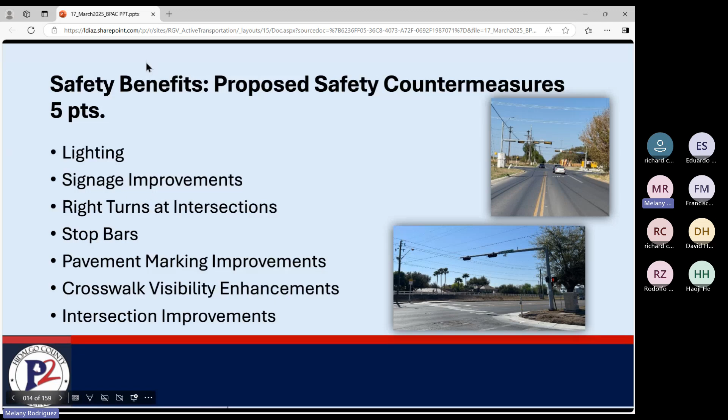Precinct 3, can you fast forward us, Melany, please, to item 4C, Los Ebanos Road. 4C is what we're going to be evaluating, so make sure you find the right scoring form on the very top of your paper. So Los Ebanos Road, 4C.

All right, thank you. That's the pointer and the clicker, okay? This one is to point if you need to point, and this one is to change slides, left and right. Oh, I control that, huh? Yeah, if you want it for your flow. We can move stuff. Does that help? Sorry, folks, not really. Trying to go to your slide. We're gonna stick to that first slide anyway. Maybe you can help. Sure, okay.

There you are. Jorge Arcata, Chief of Staff for Precinct 3, representing this Los Ebanos Road project. We're in partnership with the City of Mission on this road project. Wanted to focus, let's get to that first slide, to give you a little idea of why this project is so important to the City of Mission.

The funding we seek today will augment this project, which I think moves past desirable to the category of vital. And I'll tell you why. You can see this alignment of Los Ebanos Road, paralleled by Conway on the east and Inspiration on the west. Both of these major thoroughfares for the City of Mission, especially Conway, their main street, have very busy intersections at the expressway. Los Ebanos represents the one good opportunity for all of west Mission to create a very friendly pedestrian bicycle thoroughfare that crosses the expressway. That's the whole thrust of the request this morning.

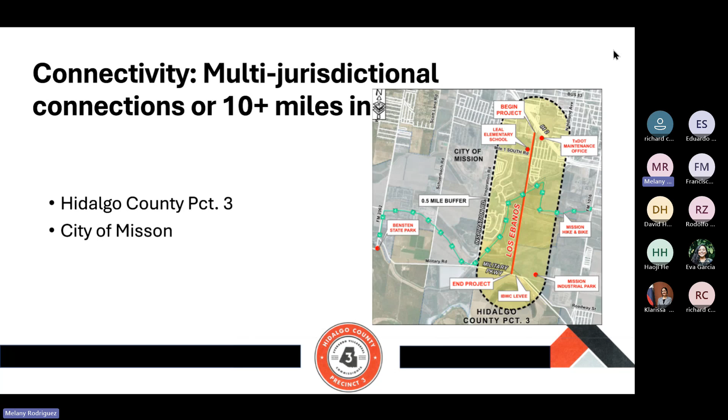Ready for any questions? Are there any questions? All right, we have one question.

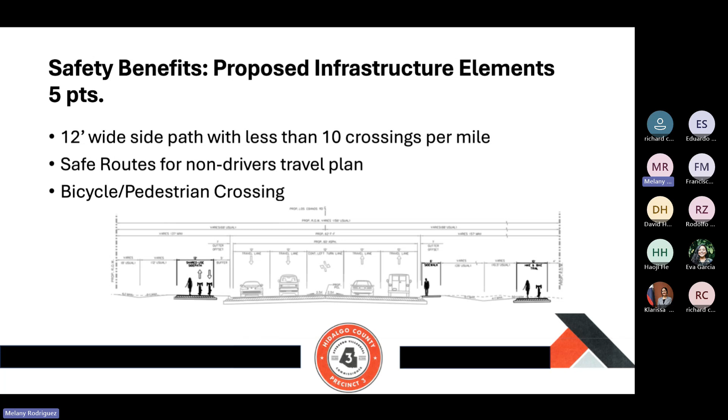Thank you. Thank you.

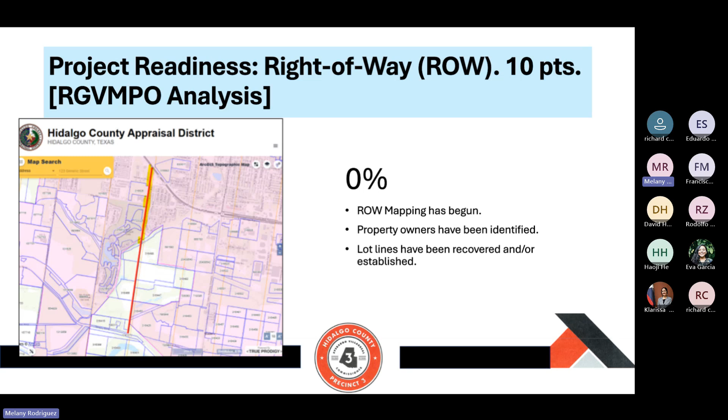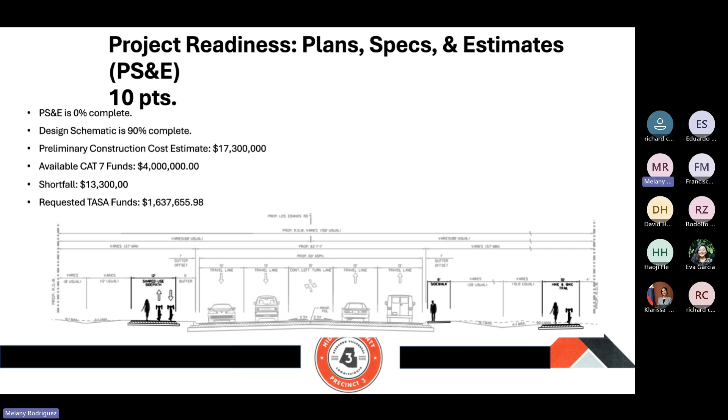Freezing too, I'm sorry, we're gonna try to go back to 4A. That was again 4C, presentation and evaluation regarding the Los Ebanos Road project proposal. For 4A, it's presentation and evaluation regarding the Cesar Chavez Road Section 1 project. Jump back. Should work as long as they don't switch this. Did you go to section 1 now? First back, first back. Yeah, as soon as they're done, you let us know and you pick them up. You can go ahead and get started.

Okay, if it's all right with everyone, I'll go ahead and get started. First of all, good morning. My name is Armando Garza, and I'm here representing Hidalgo County Precinct 2. I am the RPIC for all of the TxDOT projects in Precinct 2.

I'd like to get started with our first section, but I wanted to mention that we will have 2 sections of this project that will coincide with one of the largest local government road projects, which is the Cesar Chavez Road Project, which will begin on the south end at Ridge Road. Section 1 is from Ridge Road to Business 83, and Section 2 will be from Business 83 to Nolana. In total, the roadway project and this type of funding request will cover 3.5 miles, which is an extremely ambitious project, but we consider it to be a community altering project—not only the road project itself, but if we're able to make these walkable streets, we feel we will have a major impact, not only on the well-being of the community, but also helping it grow through economic development. And we'll also start relieving some of the traffic we always deal with on Expressway 83, giving an outlet north on Cesar Chavez.

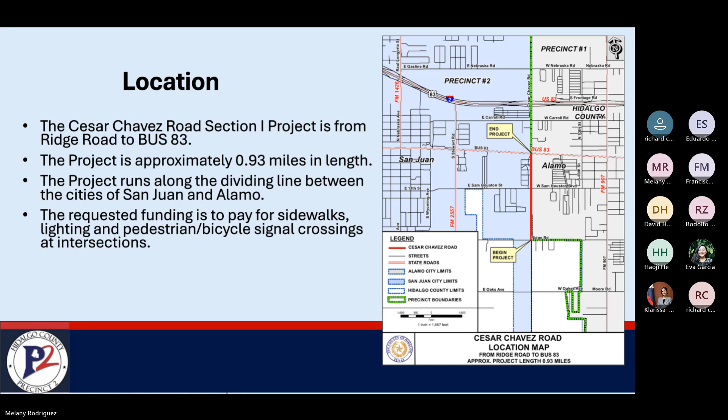This project is actually quite advanced. We have already submitted 90% PS&E to TxDOT; that was submitted on February 7th. The construction cost estimate currently is 8.671 million. We have 6.193 million in Category 7 funds. The shortfall of funds is about 2.47 million, but at this time we are only requesting $698,113.04. This project is currently scheduled for construction in fiscal year 2027, but we are very aggressive and are hoping we can accelerate that to late fiscal year 2026.

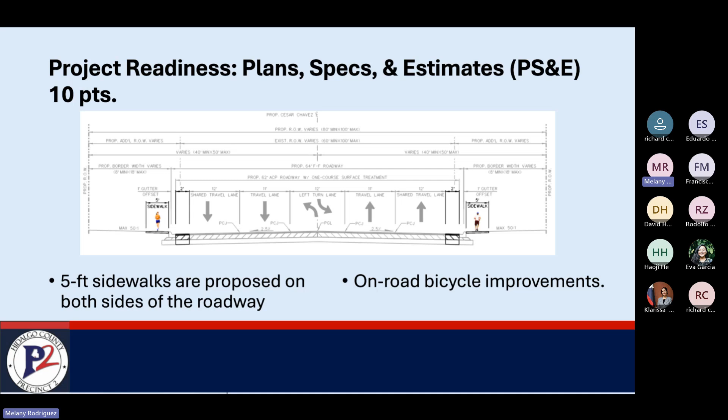This project is currently 100% environmentally cleared, and we received the categorical exclusion back in February of 2021.

Right of way is also currently very advanced. We have an executed right of way AFA, and the right of way map is 100% complete. The total number of parcels for this section is 16. We have 100% appraisal, 100% review of those appraisals, and 100% of the initial offers already complete. All final offers have been sent. We have 100% title commitments, and we currently have 9 parcels in possession and 7 under negotiation.

Utility coordination is 100% underway. I want to be clear about underway because we all know how difficult that can be. But all companies have been notified of the project, and all utility adjustments are on schedule to not conflict with the construction letting.

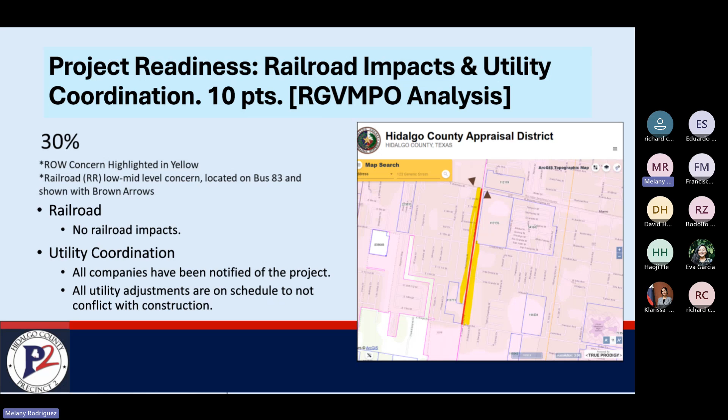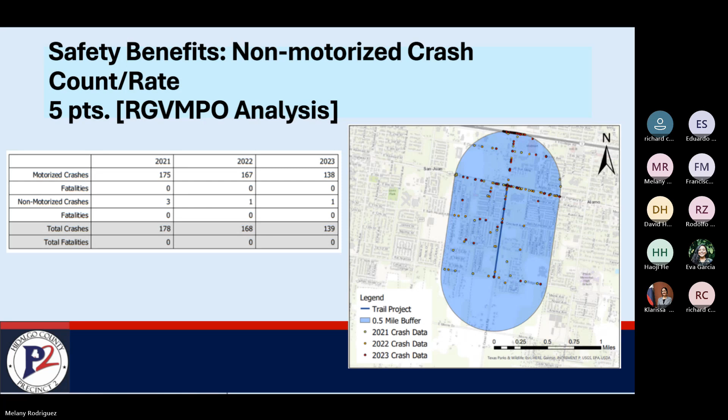Safety benefits. One of the biggest items impacting the 2 communities affected by not only the road but the sidewalks are the City of Alamo and the City of San Juan. Being some of the smaller, cash-strapped communities, they struggle to properly light these roads. We're hoping to address that issue with this project.

Also, some signage improvements to help people be better informed and safer. We're going to be adding right turns at intersections, stop bars, pavement marking, crosswalk visibility enhancements, and intersection improvements. These are all key for pedestrian safety, particularly since these communities are smaller, cash-strapped, and many times these are details we always have to seek additional funding for.

Proposed infrastructure elements, safe routes for non-drivers with a travel plan. We're going to be adding bicycle and pedestrian crossings, which are currently non-existent, and on-road bicycle facilities as well, much needed because although we do have public transportation in this area, it is limited. So a lot of people use these bicycle lanes and sidewalks, not only to get to and from work, but to get to and from schools, shopping, and commercial areas.

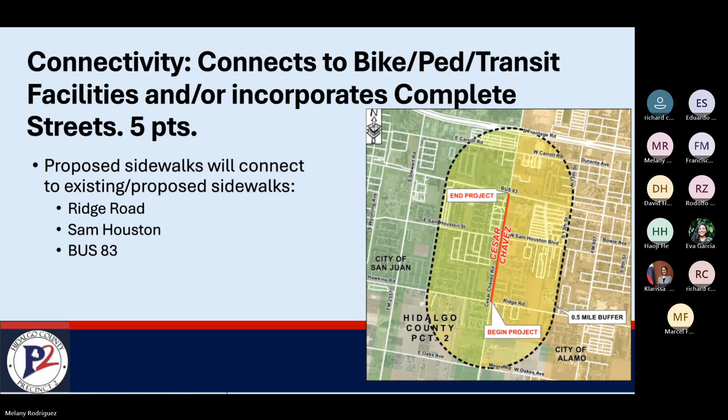As we mentioned, this area needs connectivity, particularly as it pertains to being able to go to social places like church, shopping. There's a Walmart, and something that's near and dear to our hearts, schools.

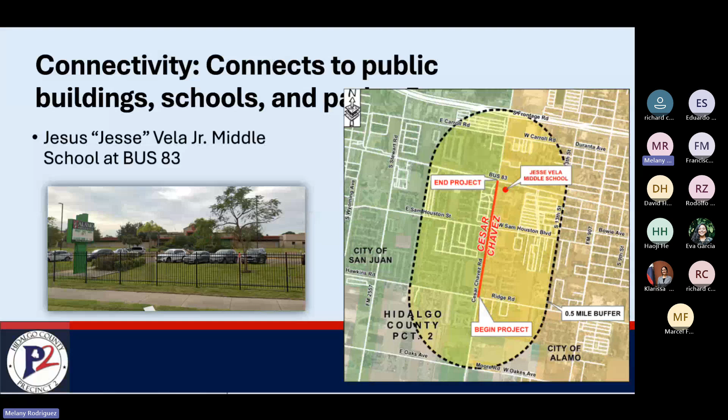There is a now called Jesse Vela Middle School right at the corner of Business 83 and Cesar Chavez. We have a lot of children walking in this area currently relegated to grassy spaces in the right of way. When it's raining or there's poor weather, that makes it increasingly difficult, and we're hoping to impact that with this sidewalk project.

We're very proud to say that we have reached out to many of the jurisdictions that will be impacted by this project, particularly Hidalgo County Precinct 2, the City of San Juan, the City of Alamo, PSJA ISD, and of course TxDOT by way of Business 83.

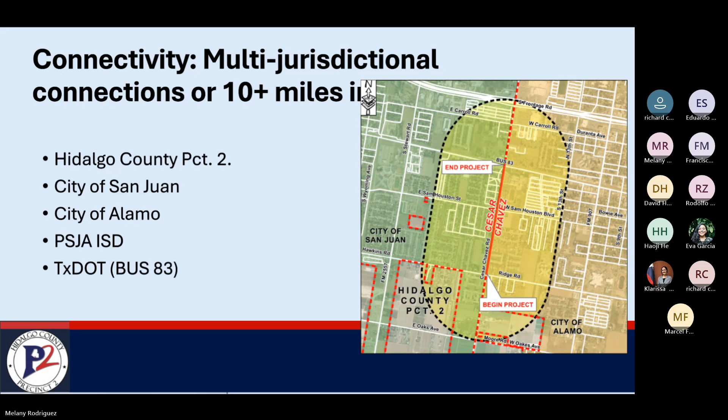I know I kind of sped through that a little bit, but I'm willing to answer any questions you may have. And if not, we have our team available as well that may be able to answer any technical questions that I cannot answer.

Thank you for the presentation. I have questions on the railroad, more from an ignorance perspective. This board's familiar with, the one time I think we had to send back money was because of a railroad issue, and I know that's why it was added. And I know this one is talking about the 30% railroad on Business 83. That was the utility coordination score the MPO analysis gave.

I don't want to say this, but you said that it's not going to give an issue with meeting the proposed timeline. I guess I'm trying to figure out, again not trying to get anybody, what are potential obstacles you see coming up?

Well, the one thing that I can tell you right now is that we've already had multiple coordination meetings with the railroad, and we're still trying to identify any potential conflicts, but at the current point we have not identified any obstacles with the railroad company. We've coordinated in the traditional ways by phone, email, but we've also done a site visit that was just completed earlier this month. In those coordination meetings and in the site visit, we feel very comfortable hearing from them that there will be no conflict at this time.

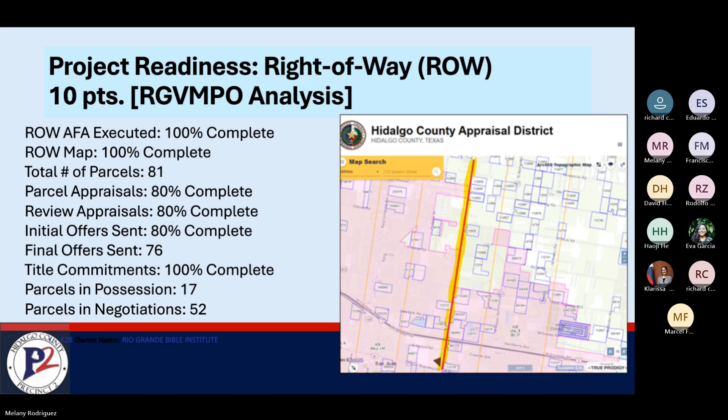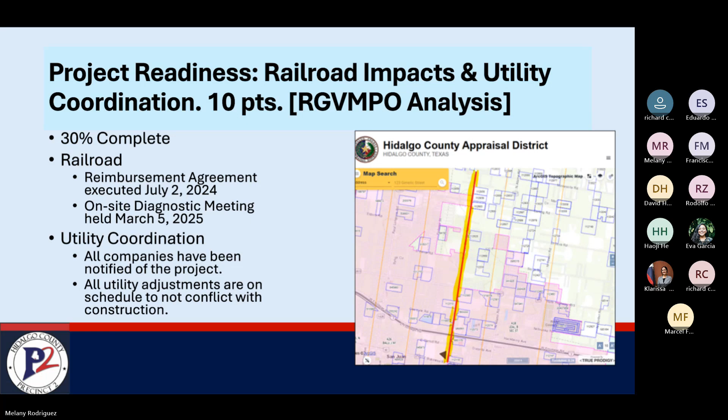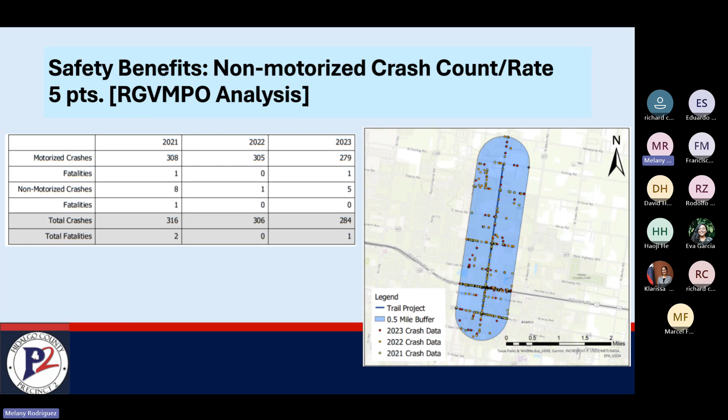Non-motorized crash count. This area had 8 non-motorized crashes in 2021, 1 in 2022, and 5 in 2023.

The proposed safety countermeasures we're proposing today are lighting, signage improvement, right turns at intersections, pavement markings, crosswalk visibility enhancement, intersection improvement, and stop bars.

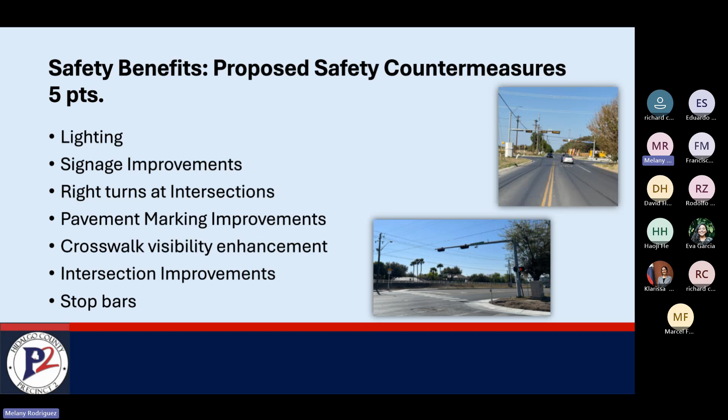Proposed infrastructure elements: we are proposing safe routes for non-drivers with a travel plan. We're going to add bicycle pedestrian crossings and on-road bicycle facilities.

This project currently does not promote and/or enhance resilience and sustainability elements. But as I mentioned in my discussion of section 1, we feel that once the project is fully implemented, we will begin to see some of these naturally and organically come up.

Again, this is a historically disadvantaged tract. Although there has been some economic development along portions of this area, those are very recent, and there are significant low-income families living here. We feel that projects like these can only serve to benefit not only the livelihood, but also the well-being of the community that has been disadvantaged for way too long.

Again, this project is within the MPO transportation plan as well as the TIP, and is currently funded under category 7.

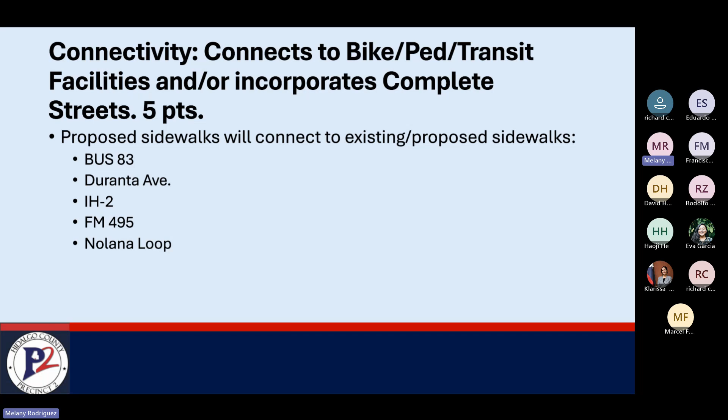There are several churches within the project limits: Iglesia Bautista Sendero, Iglesia Adventista del Séptimo Día, the Rio Grande Valley Apostolic Church, and the Bibleville Conference Grounds. We think it's extremely important to give safe bicycle and pedestrian access to individuals in this area for worship and other necessities like school and shopping.

Connectivity to a multi-jurisdictional connection, much like the previous segment. Precinct 2 has coordinated with the City of San Juan, the City of Alamo, PSJA ISD, and TxDOT.

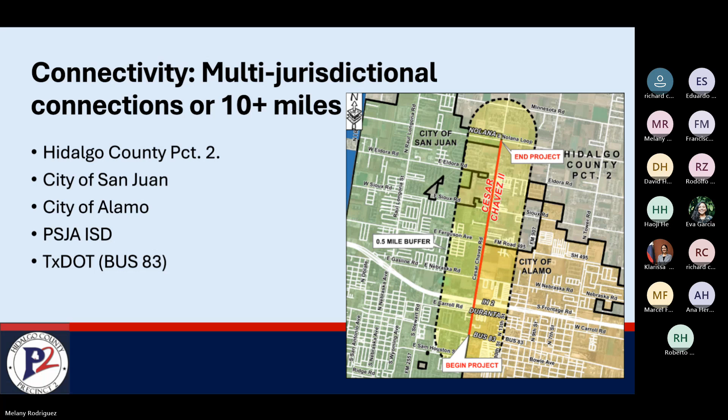As I mentioned in the beginning, this is a very ambitious project that has been in the works and being planned for almost 10 years now. I think we've advanced this project a lot. We've accomplished many things that at first did not seem possible for local government to do. But we're proud to say that we've been able to do that with the leadership of Commissioner Cantu, our engineers, and partners at L&G Engineering, and the cities of San Juan, Alamo, and the school district of PSJA ISD.

Being from the city of San Juan and being an alumnus of PSJA ISD, I can tell you this project brings me personal pride. Commissioner Cantu, also being an alumnus of PSJA ISD, takes these projects very, very seriously. We grew up in this community, and we feel it's not only our responsibility to provide for this historically disadvantaged area, but it is our privilege to serve our community and bring these amazing new projects that are going to be very transformative for this entire area. If you have any questions on segment 2 or segment 1, I'll be happy to answer.

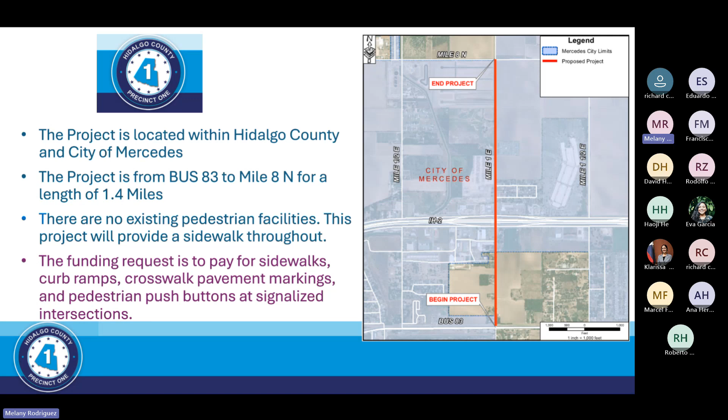Project readiness: the PS&E's are 60% complete. Construction cost is estimated at $9.5 million. Available funds are $6 million. Our shortfall is $3.5 million. We are requesting $772,000. This is scheduled for construction fiscal year 2027.

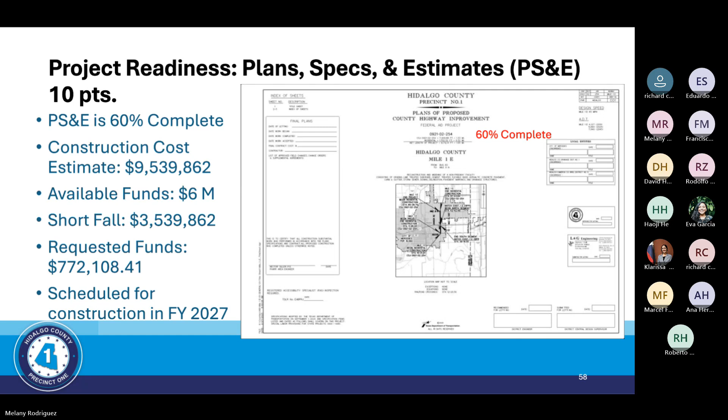This is project readiness. Mile 1 East is environmentally cleared. Categorical exclusion received September 2015. Reevaluation approved August 2022.

Project readiness: the right-of-way AFA has been executed, the right-of-way map is complete. Total parcels is 30 fee simple, 16 easements. Parcel appraisals are 50% complete, review appraisals are at 50% as well. Initial offers have been sent out and it's at 50% complete. Title commitments 28, and parcels in negotiation 20.

Railroad: preliminary engineering agreement with Union Pacific has been executed, coordination is at 60% completion. Utility coordination: the coordination was compensable and permitted utilities are at 60% as well.

Safety benefits: the non-motorized crashes from 2021 through 2023 are 4. Proposed safety countermeasures will have signage improvements, pavement marking improvements, crosswalk visibility enhancements, and pedestrian push buttons, separating pedestrians from motorized traffic, safe routes for non-drivers travel plan, pedestrian crossing, and traffic calming.

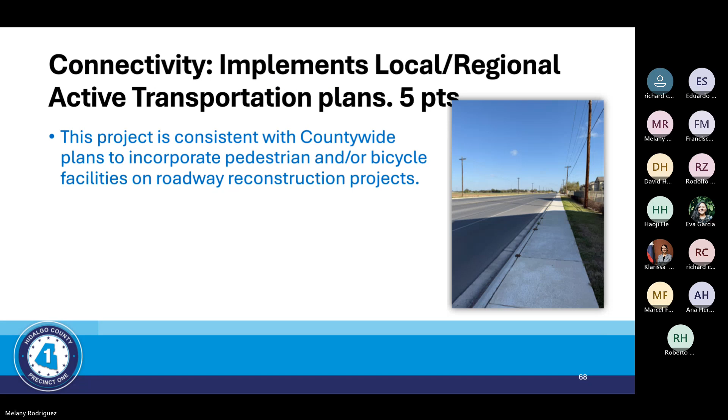Connectivity, this project is consistent with countywide plans to incorporate pedestrian and/or bicycle facilities on roadway reconstruction projects. Mile 1 East will be the first corridor in a developing area to include pedestrian facilities.

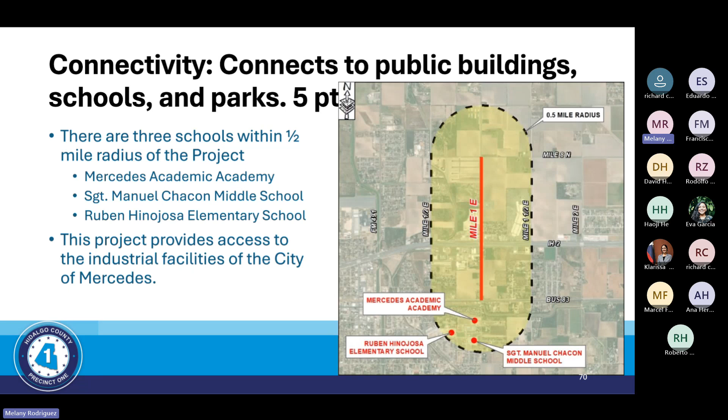Connectivity connects to public buildings, schools, and parks. There are 3 schools within a half-mile radius of the project: Mercedes Academic Academy, Sergeant Manuel Chacon Middle School, and Ruben Hinojosa Elementary School. This project also provides access to industrial facilities of the city of Mercedes.

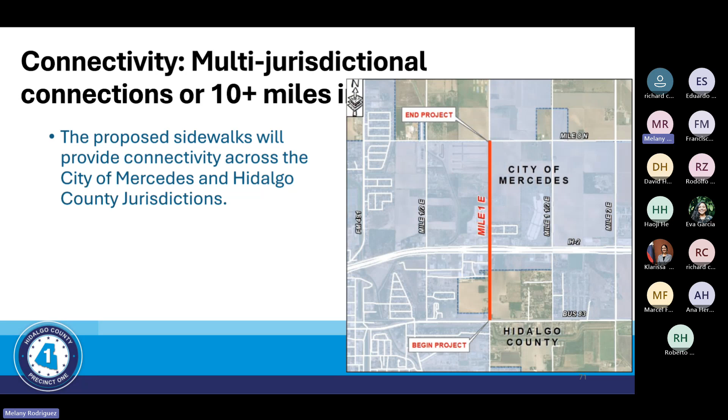The proposed sidewalks will provide connectivity across the city of Mercedes and Hidalgo County jurisdictions. And that's the end of that presentation. Any questions?

Morning. Morning. I just want to say one thing - I love the north and south routes. That's all, especially in August. Hopefully there are trees in some of those areas, so you get shade either in the morning or the evening, but I love the north and south. Thank you, that's my comment.

Can you elaborate a little more on the railroad, the partnership you guys have with them? We just had also a meeting, but I'm going to defer to our engineer consultant.

Hello, my name is Jacinto Garza with L&G Engineering. The railroad question you have on that - the reason we put 60% on that project is because there is no storm drain that's going to go underneath the railroad. The coordination is there to replank. There are 2 lanes right now; there will be 2 lanes with shoulders, and there will be mast arms. This is not a project where we are going in and having to tunnel under them, etc., as in other cases. That's why it's at that coordination level.

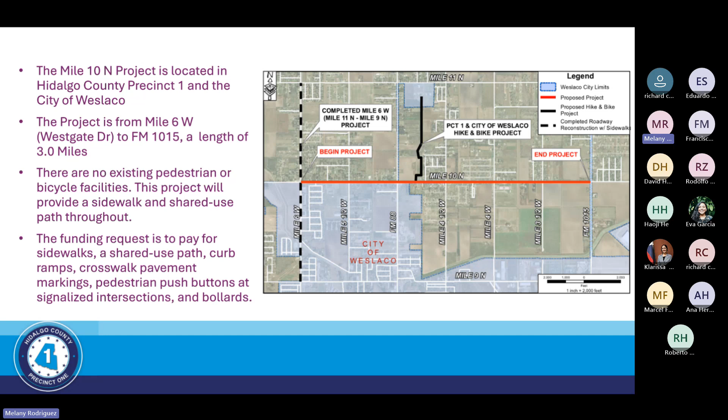There are no existing pedestrian or bicycle facilities. This project will provide a sidewalk and shared use path throughout. The funding request is to pay for the sidewalks, shared use path, curb ramps, crosswalk pavement markings, pedestrian push buttons at signalized intersections and bollards.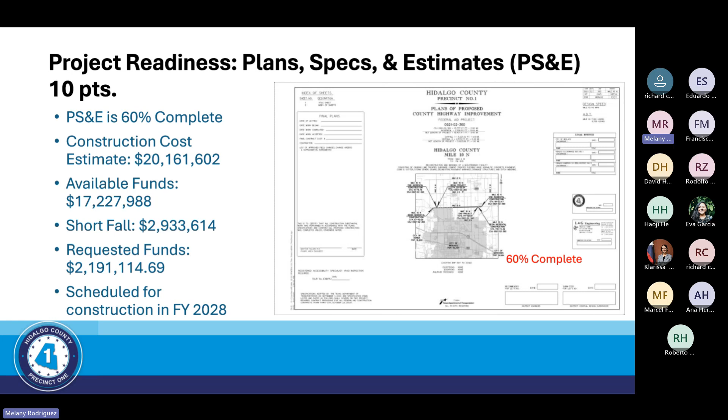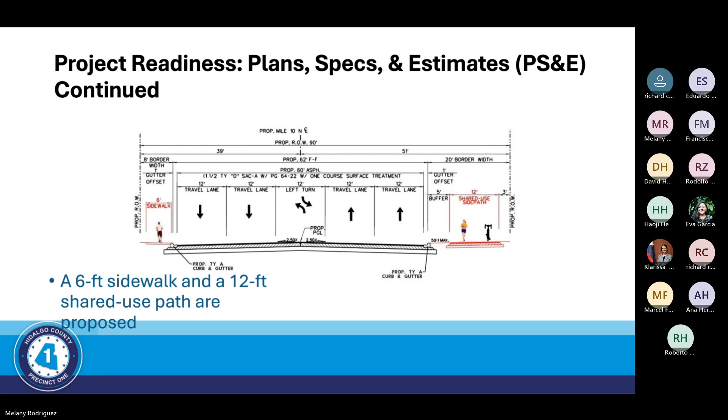Project readiness - as you see in the typical section, a 6-foot sidewalk and a 12-foot shared use path are proposed with a 5-foot buffer. Same thing, a sidewalk and a shared use path are proposed.

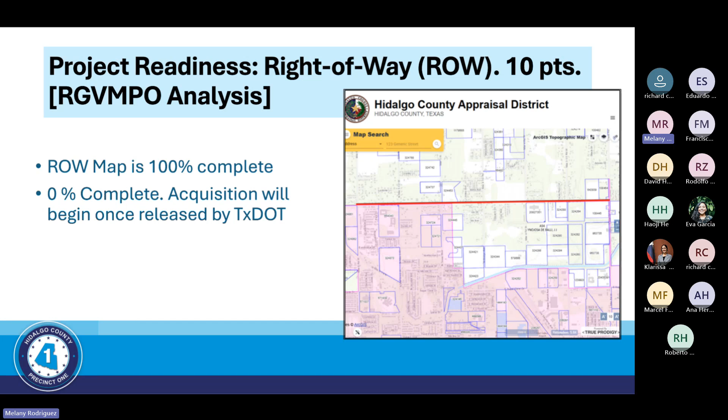Project readiness: Mile 10 is environmentally cleared - categorical exclusion was received April 2024. The right-of-way map is 100% completed. We have 0% acquisition; we'll begin once TxDOT releases us, and we're hoping and praying that in the next 90 days we'll get released to buy the right-of-way.

Railroad impacts - there will be no impact, there's no railroad crossing here. Utility coordination with compensable and permitted utilities is at 60% complete. Safety benefits - non-motorized crash data shows non-motorized crashes from 2021 through 2023 totaling 3.

Safety benefits include separating bicycles and pedestrians from motorized traffic, safe routes for non-drivers travel plan, bicycle pedestrian crossing, traffic calming, and a sidepath with less than 10 driveway crossings per mile.

The project does not promote any resiliency and sustainability elements.

Equity: yes, the project falls within a historical disadvantaged tract.

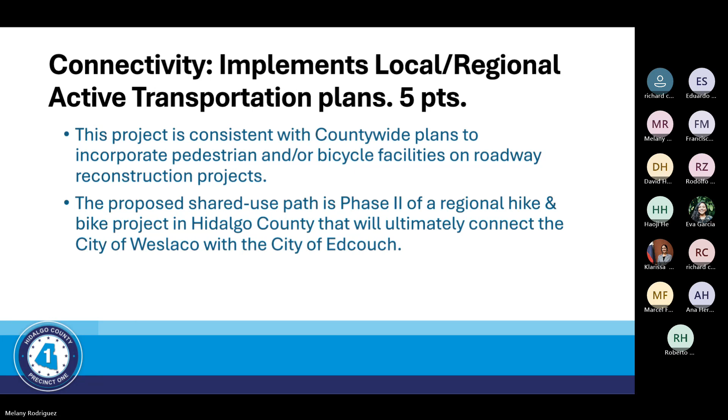The proposed bike pedestrian facility will connect to the recently completed Mile 6 West, which is Westgate, from Mile 9 North to Mile 11 North. We will connect to Mile 10, and connect to the proposed Weslaco hike and bike trail.

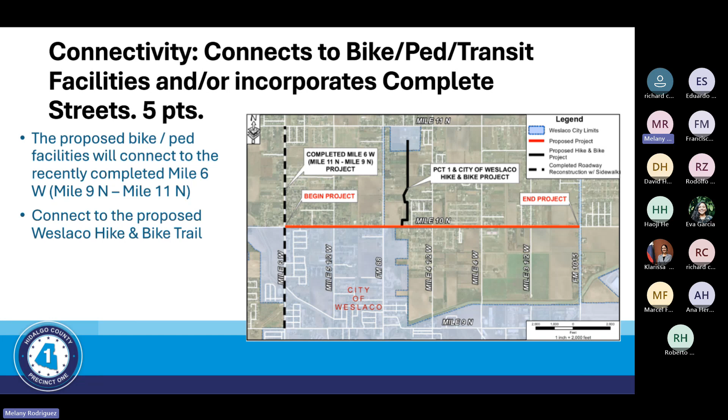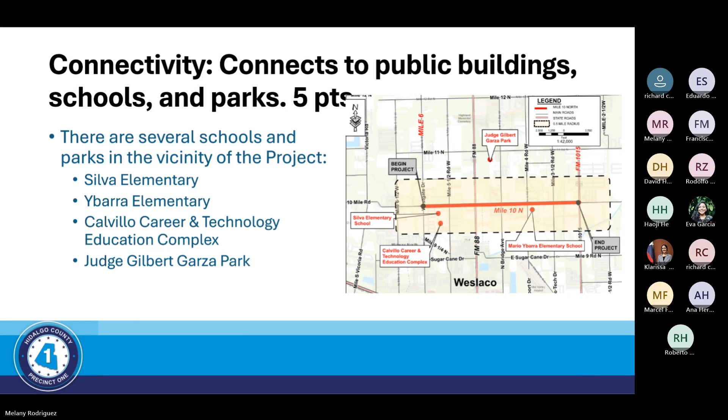There are several schools and parks in the vicinity of the project: Silva Elementary, Ybarra Elementary, Career and Technology Education Complex, and Judge Gilbert Garza Park. The proposed sidewalks will provide connectivity across city of Weslaco and Hidalgo County jurisdictions.

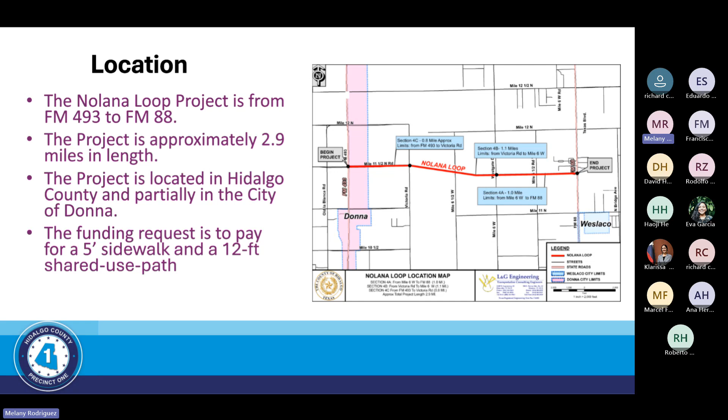Location: the Nolana Loop project is from FM 493 to FM 88, approximately 2.9 miles in length. It's located in Hidalgo County and partially in the city of Donna. The funding request is to pay for the 5-foot sidewalk and the 12-foot shared use path as previously mentioned.

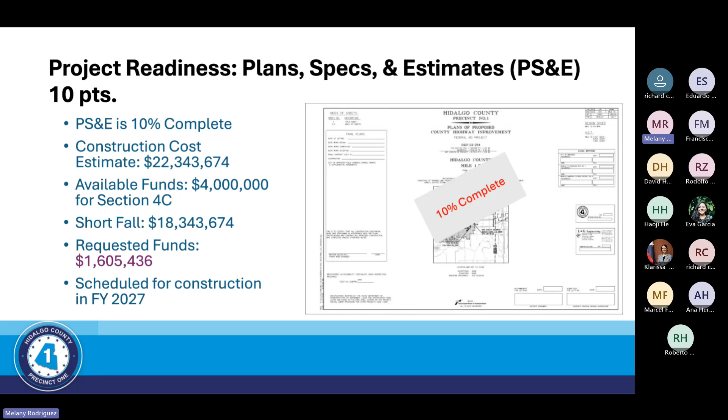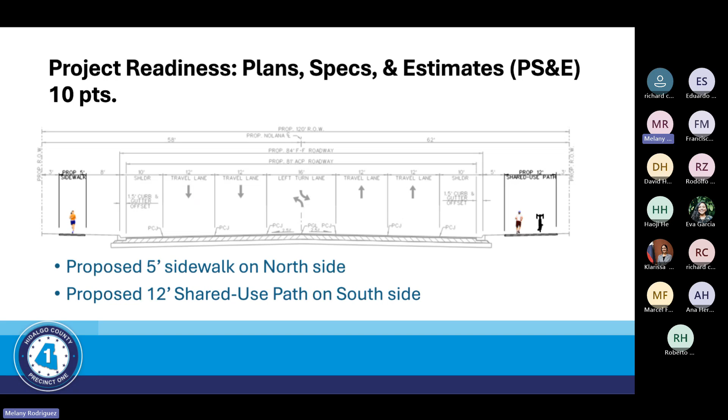Nolana Loop Segment 4 is environmentally cleared. It has a FONSI that was received in July of 2020. Reevaluation is currently underway.

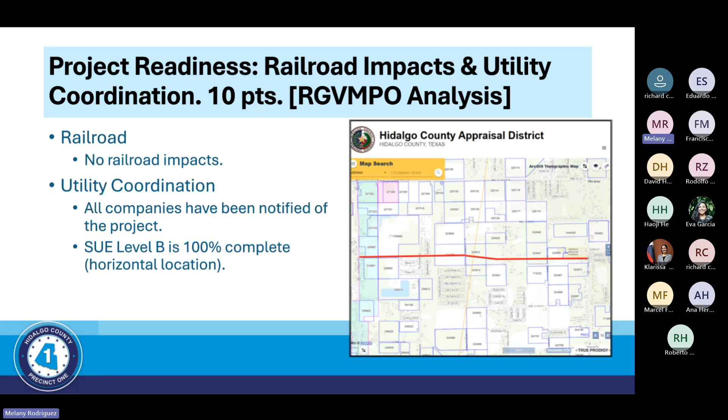Right-of-way acquisition is currently at 0%, but property owners have been identified. There are no railroad utility impacts, and all companies have been notified of the project. SUE level B is 100% complete with horizontal location.

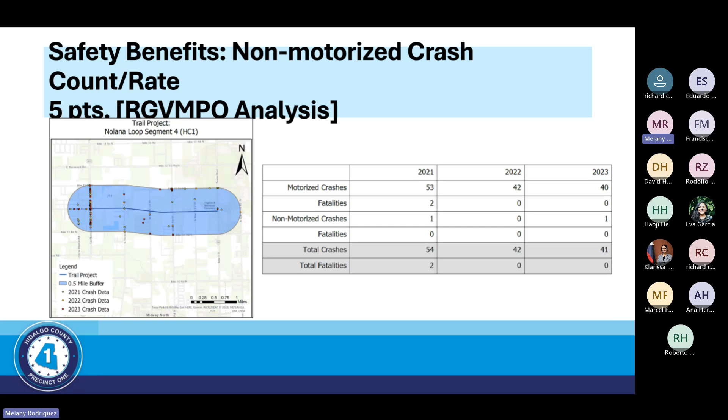The overall non-motorized crashes since 2021 to 2023 are a total of 2. The proposed safety countermeasures for this project include lighting, signage improvements, pavement marking improvements, crosswalk visibility enhancement, and pedestrian push button signals.

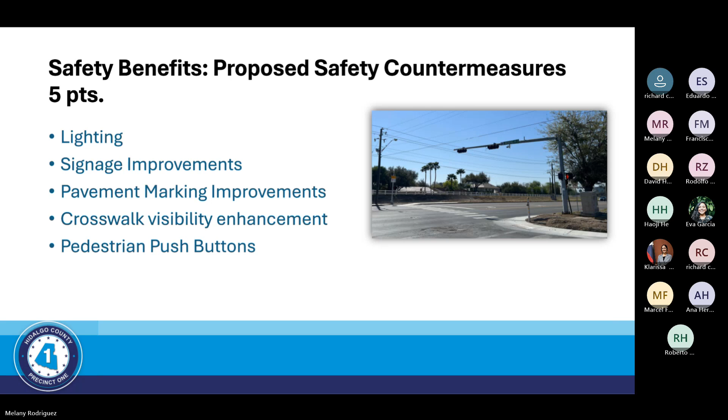The proposed infrastructure elements include separating bicycle and pedestrians from motorized traffic via the 12-foot shared use path with less than 10 crossings per mile, safe routes for non-drivers travel plan, bicycle pedestrian crossings, and traffic calming elements.

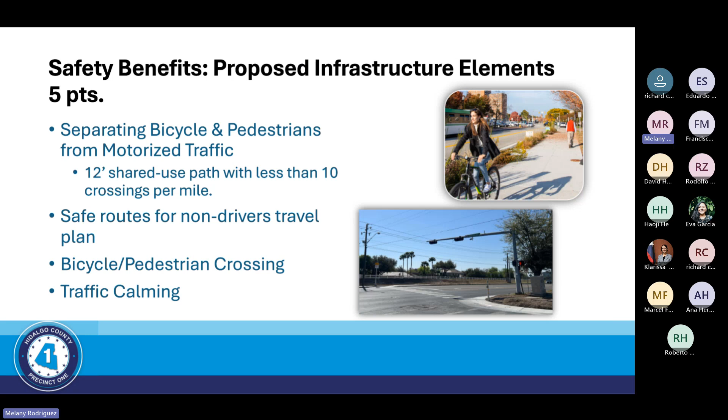The sustainability and resilience element to this project includes the proposal of powered solar lighting across the shared use path. This project does fall within a historically disadvantaged tract.

This roadway project is currently listed on the RGV MPO's Metropolitan Transportation Plan and the Transportation Improvement Program. The proposed sidewalks will connect to the existing proposed sidewalks on Mile 6 West and FM 88, and it connects to public buildings, schools, and parks via the Funeraria del Ángel Cemetery at Highland Park and Weslaco City Park on FM 88.

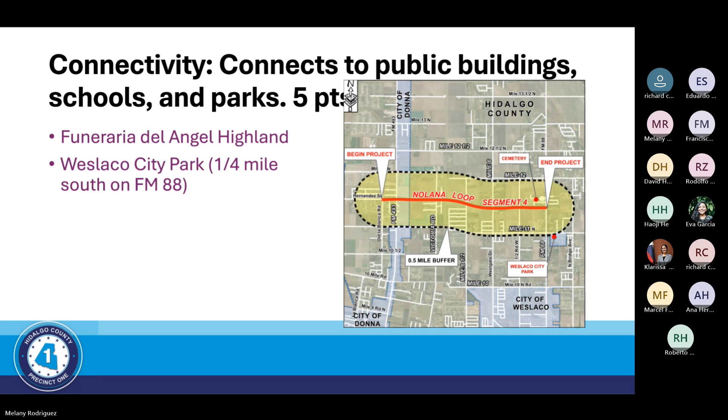The proposed sidewalks will provide connectivity across the city of Donna and Hidalgo County Precinct 1. The Weslaco City Park is also within a half-mile radius of the project.

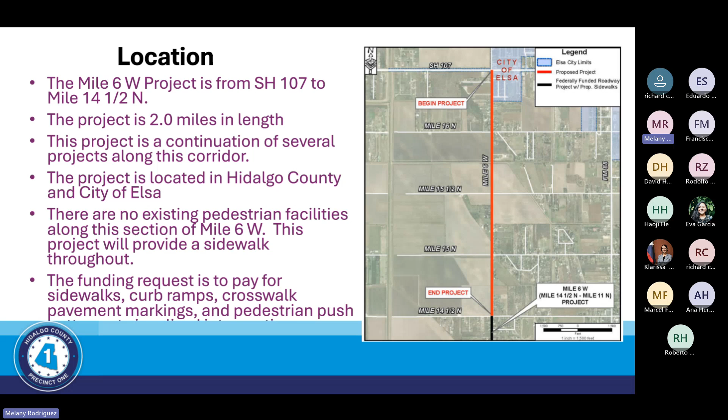PS&Es are currently at 95% completion. Our construction cost estimate is $12.1 million. We currently have $10.8 million available. Our shortfall is approximately $1.4 million. We are requesting $1 million. It's funded for construction in fiscal year 2028, but we are looking to accelerate to fiscal year 2026.

Mile 6 West is environmentally cleared. It received its FONSI in December 2015, and the reevaluation was approved in February of 2023.

There are no impacts to any railroad utilities, and there are also currently no compensable utilities. Coordination with the permitted utilities is at 90% completion.

From 2021 to 2023, there were no non-motorized crashes on this section. The proposed safety countermeasures include signage improvements, pavement marking improvements, crosswalk visibility enhancements, and pedestrian push button signals.

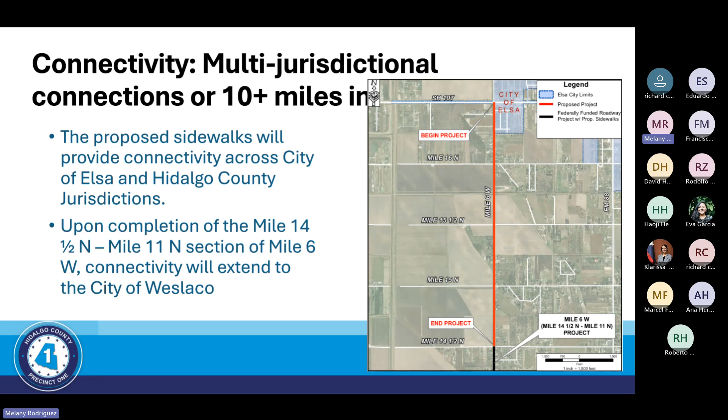For multi-jurisdictional connections, we have connectivity between the city of Elsa, Hidalgo County jurisdictions, and upon completion, the entire Mile 6 West improvement project will connect to the city of Weslaco. Any questions?

So if I understand correctly, mile 6 is Westgate, correct? Yes, and that's already gone through two phases of expansion and upgrades. So this would be connecting where it's currently, where the upgrades have stopped, all the way up to 107. Yes, because that's connecting to Elsa.

And then you did mention that some of those sidewalk and pedestrian traffic improvements will go south, because some of the steps you're proposing for this section don't exist in the southern portion, but you said you would like to upgrade the southern portion to include some of these upgrades as well. I think that was a bullet point. I just want to confirm I understood correctly. Let me verify.

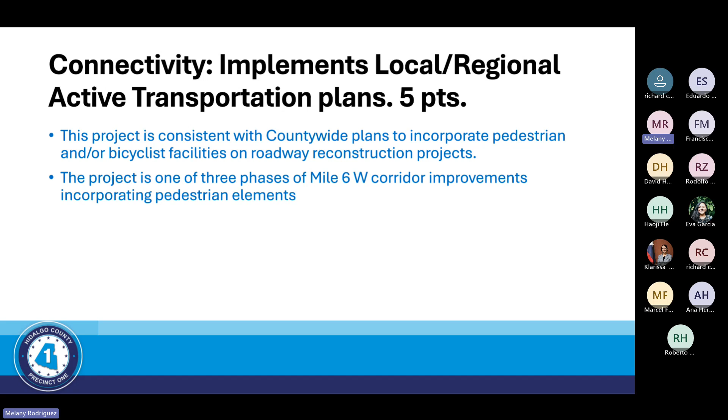I guess I want to understand what that means. So the existing section is mile 9 to 11 - those have sidewalks currently as part of their improvements. Mile 14.5 and 11 will include that as well, but because that project's not ready to let to completion, whereas this one on the north side is - there's already sidewalks from the expressway all the way to 11.

Yes, I've seen them there. The expressway all the way to 11. This will be a continuation going all the way to West.

Yeah, but from what I've seen when I drive there - I used to drive to Edinburg all the time and take mile 6 - there's sidewalks, but there's no push buttons or anything other than just sidewalks on those improvements. There's a really wide shoulder, which is great. But that's why I wanted to make sure I understood that bullet point. Hopefully that means it will connect from Business 83 to Elsa, which I think is a much needed project. So just wanted to make sure I understood.

We will have to look at the expressway, but on Mile 9, Westgate and Sugarcane, there is - push buttons? Yes, they are. And then Mile 10 all the way to Mile 11.

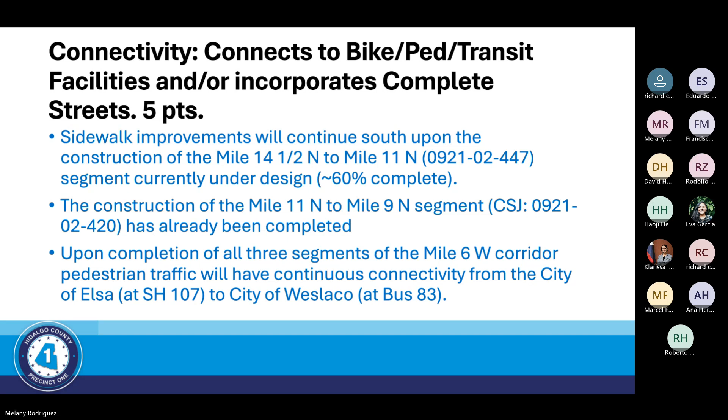Any other questions? Oh, it's green. Okay, thank you. Let's see, so I have a few questions just to sort of make sure I'm understanding this.

So there was still a difference between the requested funds - there was the shortfall, and then the requested funds that would address most of the shortfall. And then there was about 347,803.76 left after the requested amount. So I guess I want to know what's the plan for that. That's my first question.

We'll let our consultant answer that one. That requested funds of $1 million is just a typographic error. The requested funds is what's shown at the very beginning, which is 760,000. And I trust that will take care of the outstanding 34.7.

Yes. Okay, thank you. I would like to know more about the signals and push buttons. Do these include accessible pedestrian signage, things like audible signaling? And this was in the second project - both of these, or all these questions, are for the second project. Well, I do believe these are with ADA compliance in mind, so...

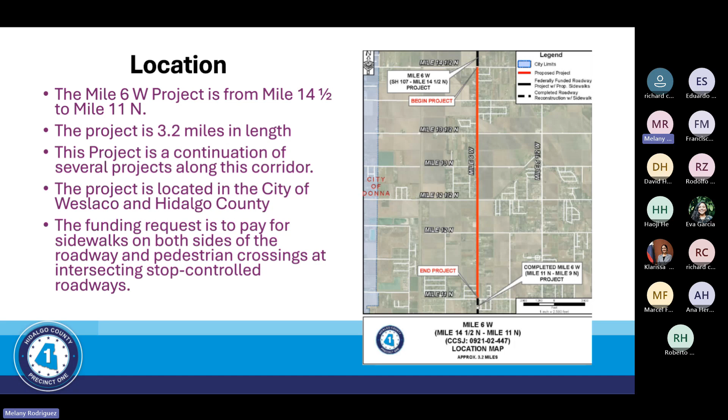Mile 6 west project is from mile 14 and a half to mile 11 north. It is 3.2 miles in length. It's a continuation of several projects along the corridor, and it is located within the city of Weslaco and Hidalgo County. Funding request is to pay for the sidewalks on both sides of the roadway and pedestrian crossings at intersections and at intersecting stop controlled roadways.

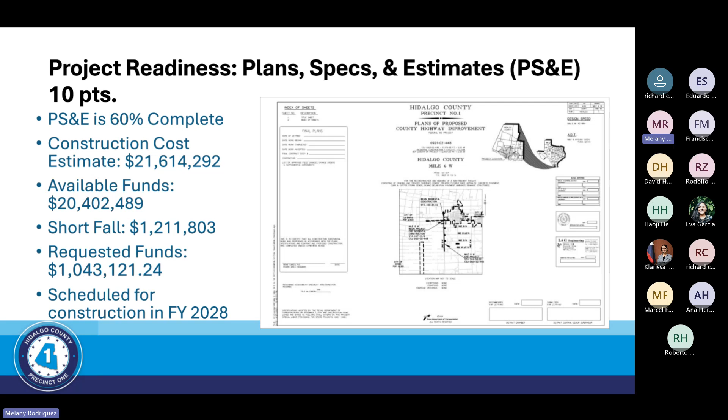PS&Es are currently at 60% completion. Our estimated construction cost is $21.6 million. We currently have $20.4 million available. Our shortfall is $1.2 million, and we are requesting $1,043,000. It's scheduled for construction in fiscal year 2028.

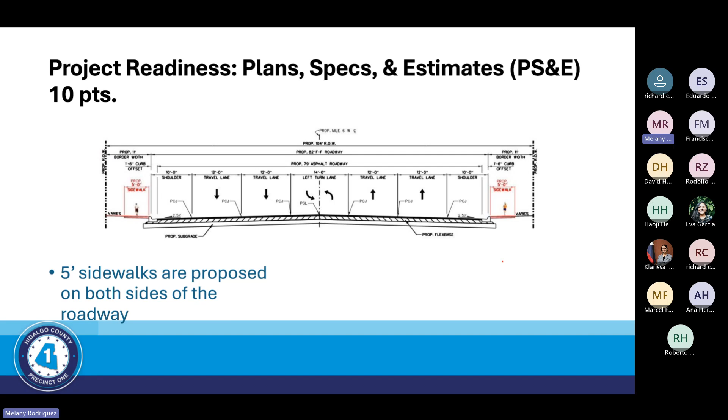For the typical section, 5-foot sidewalks are proposed on both sides of the roadway. It is environmentally cleared. The FONSI was received in December 2015, and it was reevaluated and approved in February of 2023.

Our right-of-way AFA is executed at 100% completion. Our right-of-way map is also 100% complete. There are a total of 87 parcels related to the project. 34% of them have been appraised. We've also completed 34% of the review appraisals.

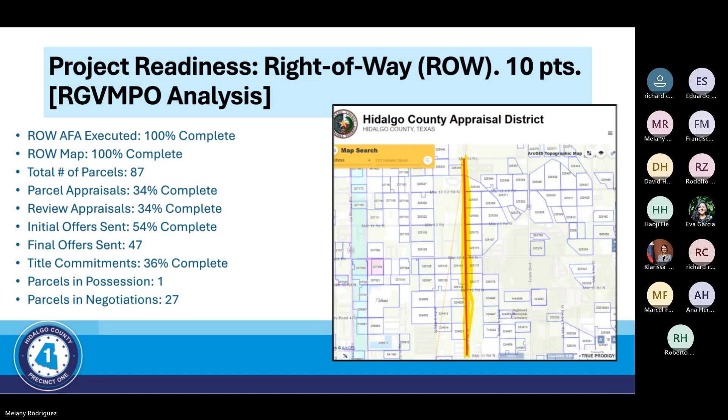We've sent 54% of our initial offers. 47 final offers have been sent. We have 36% completion on title commitments. 1 parcel is currently in possession and 27 are in negotiations. There are no railroad utility impacts, and our coordination with compensable and permitted utilities is 60% complete.

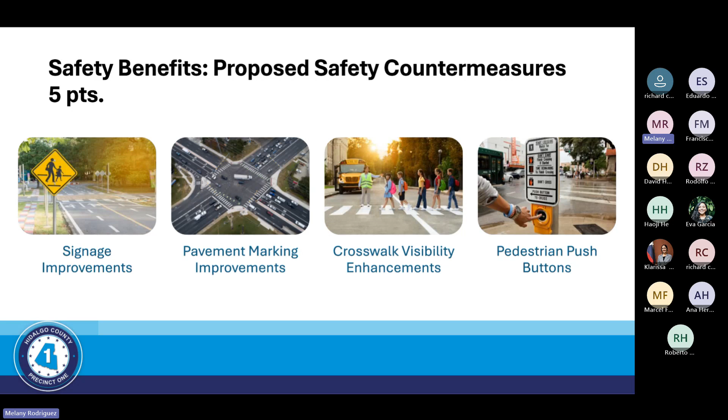From the year 2021 to the year 2023, there are a total of 2 non-motorized crashes in the area. Our proposed safety countermeasures include signage improvements, pavement marking improvements, crosswalk visibility enhancements, and pedestrian push buttons at signals. We are proposing to separate pedestrians from motorized traffic, safe routes for the non-drivers travel plan, pedestrian crossing, and traffic calming elements.

This project does not promote and/or enhance resilience and sustainability elements. The project does fall within a historically disadvantaged tract. As far as regional and active transportation plans, the roadway project is listed on the RGV MPO's MTP and the TIP.

The construction of this section of Mile 6 corridor will connect with the completed section from Mile 11 north to Mile 9 north. The sidewalk improvements will continue north from the end of the section of State Highway 107, currently under design at 90% completion. Upon completion of all 3 sections of the Mile 6 West corridor, pedestrian traffic will have continuous connectivity from the city of Elsa to the city of Weslaco.

The Mile 6 West project will also connect to the proposed Mile 10 North and the Nolana Loop projects currently under design. The proposed sidewalks will connect to Abundant Life Ministries. The multi-jurisdictional connections include the city of Elsa and the city of Weslaco, as well as Hidalgo County jurisdiction.

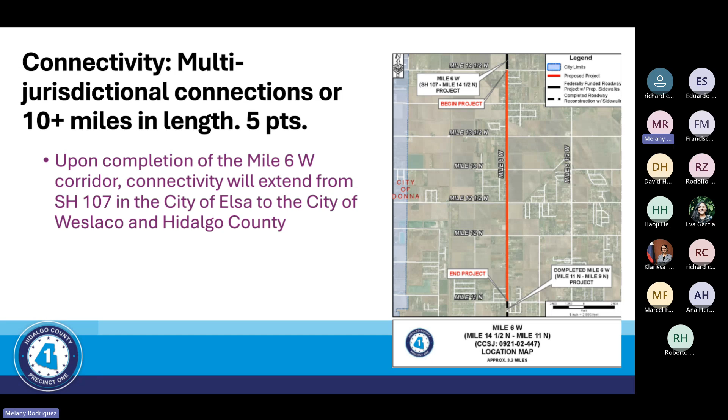Yes, that's the one that connects to 911. That's why it sits out.

Any questions? Hi. Let's see.

So I want to know two things. Could you please summarize, since you touched on them across the three different presentations, how these three projects are connected, either physically or socially, in terms of the needs of the community?

Well, of the projects presented so far, I'll start with Mile 9 from the expressway over to Mile 11 — that one was already completed, and he just presented two more phases on Mile 6 over to 107. We presented Mile 10 a little while ago. I presented Mile 10, which connects from the expressway and Westgate to 107.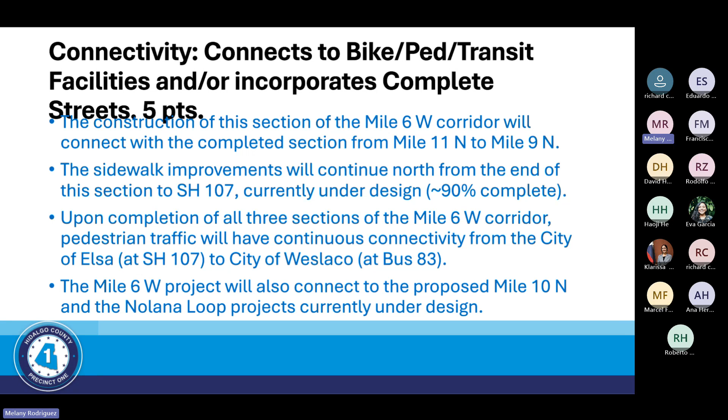Thank you. And then I had a question about the parcels of land. Across these proposals, how will you make sure that you safeguard the character and interests of the community while moving forward with this project to provide this facility? Since we're talking about purchasing land, where is that coming from, and how are you going to make sure you're safeguarding the interests of the community?

Yes, absolutely. Your question is on the Mile 6 project and the issues associated with the acquisition of the right-of-way. There's been extensive public involvement on this Mile 6 project, going from the expressway all the way to 107. It's been cut up into several sections, vetted, and presented at public meetings and public hearings, and acquisition is ongoing to acquire those properties to build the highway.

What we presented to the public was that sidewalks were going to be built for the entire length of the project. Appraisals are being done after receiving environmental clearance from TXDOT and completing a right-of-way map, then receiving authority to go ahead and buy the property with federal funds at an 80-20 shared cost. The county is in the process of buying all that land.

These projects are in that process right now, and what we're proposing is, because we're putting sidewalks all the way across, the county is short on funds, and we're before this board for y'all to consider so these sidewalks can be built connecting one community to the other. So the right-of-way has followed the process and gone through public involvement, and the community has been notified — it is ongoing, being bought right now. The numbers for how many parcels on each project were identified in the slides. Does that answer your question?

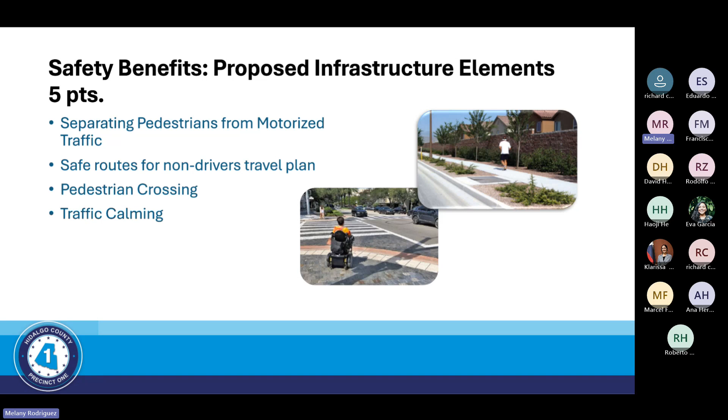Questions? Thank you. You've got one more, right? Yes. We get points for that? We left the last one. No, but you remembered a green tie. Yeah, okay, thank you, thank you.

The Weslaco Hike and Bike Trail project is phase 1 of the regional plan for pedestrian and bicycle facilities. The project is from Judge Gilbert Garza Park to Mile 10 North, a length of 1 mile, located in Hidalgo County and the City of Weslaco. This is a joint project with the City of Weslaco and Precinct 1, going 50-50. To reduce costs, the alignment was revised from the 2023 TASA application. If you all recall, in 2023 we requested, but we changed the path a little bit to reduce costs.

The cost estimate now for construction is 1.8 million. Available funding is 1,179,000 from the carbon reduction program, fiscal year 2028. TASA funding request is 1.2 million to pay for hike and bike trails with safety and decorative fencing, lighting, and landscape amenities, to encourage environmental and surveying costs.

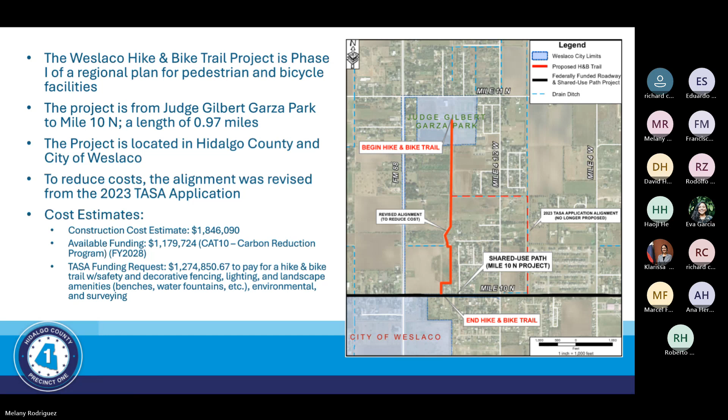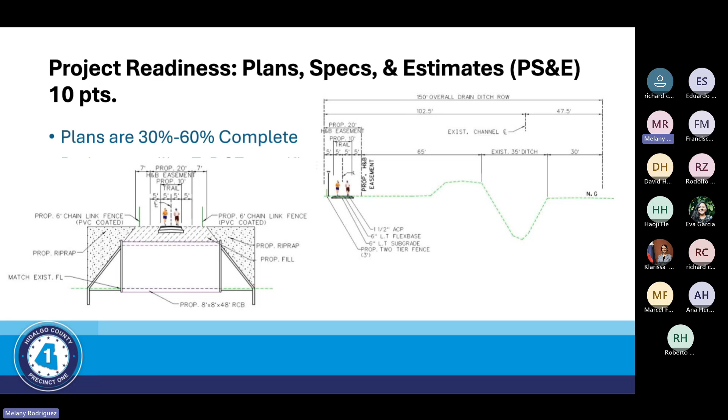Project readiness: the plans are about 45% complete, within the 30 to 60 percent range our consultants targeted. The project will be environmentally cleared within 12 months, and we anticipate a categorical exclusion. No right-of-way acquisition will be required for this project, so we're 100% on right-of-way. There are no impacts on railroad or utility coordination; after thorough review, no utility adjustments are anticipated.

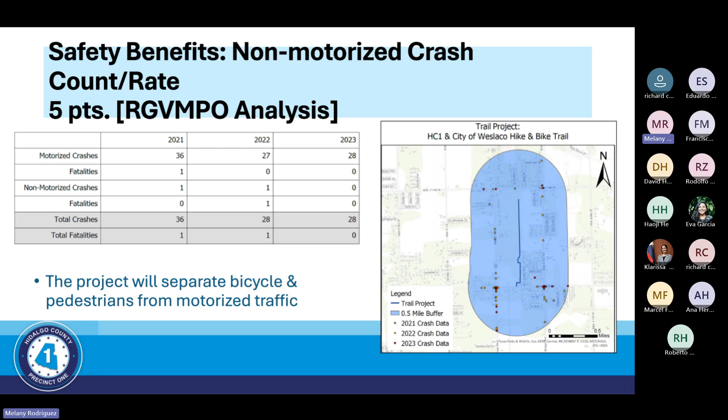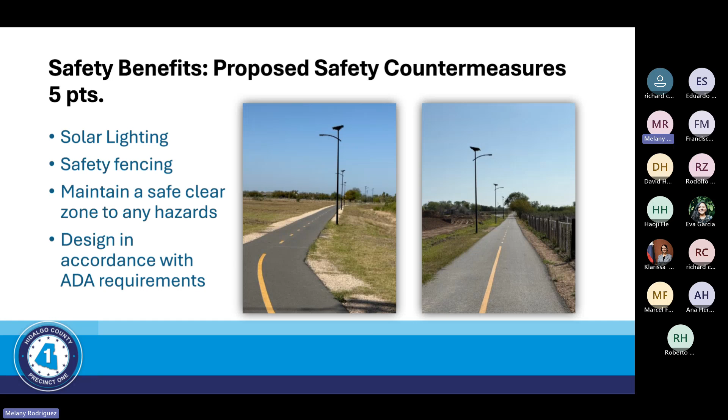Safety benefits: non-motorized crash count shows 2 crashes from 2021 to 2023. The safety benefits will include solar lighting, safety fencing, and maintaining a safe clear zone from any hazards, designed in accordance with ADA requirements. There's a picture of a beautiful trail with solar lighting. We're separating bicycle and pedestrian traffic from motorized traffic using bollards, as shown in the picture. Traffic calming bollards and barriers will prevent motorized vehicles from entering the trail. Landscape amenities include water fountains, benches, trash cans, etc.

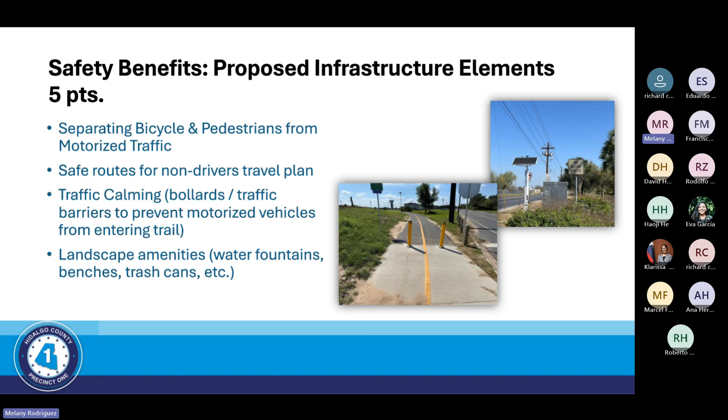For resilience, there will be solar power lighting and some landscaping and bench areas. For equity, yes, the project falls within a historically disadvantaged tract.

Connectivity: future phases of the Hidalgo County Precinct 1 and City of Weslaco Hike and Bike Trail intend to expand connectivity from Mile 10 North west to Mile 6 West, and east to FM 1015, and northeast towards the shared use path proposed for the federally funded FM 1015 project between Mile 10 North and State Highway 107 in the City of Ed Couch. The project connects to existing paved trail facilities within Judge Gilbert Garza Park, the city park on the north, which has a nice paved and non-paved trail in a wooded area. The project will tie into the sidewalk and shared use path proposed under the Mile 10 North project and beyond to Mile 6 West and FM 1015.

I'll explain the connectivity here, since you've been asking about it, and I misspoke a little while ago. The Mile 6 West from Expressway Road to 107 is more like 9 miles. Then you have Mile 10 east to west, from Mile 6 all the way to 1015, which is under 3 miles. And here we're proposing a mile going north from Mile 10 to the city park, which has another mile inside it. So you're looking at about 14 miles of trail total.